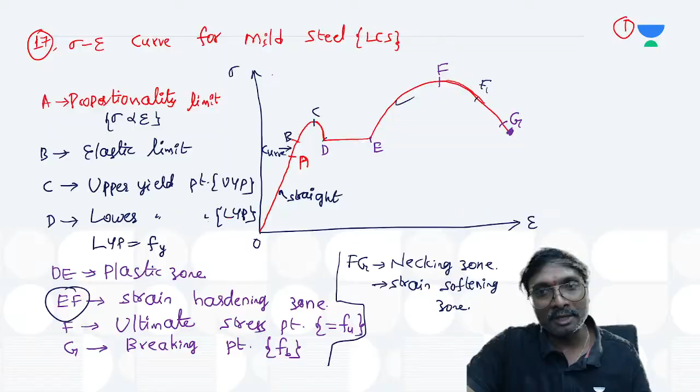Now coming to this, which part we have discussed - 16 lectures are already over now. Today we are doing the 17th lecture, right everyone?

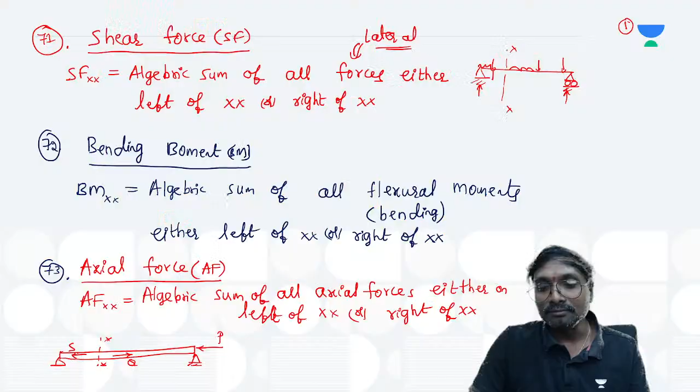Today which lecture are we doing? This is the 17th lecture.

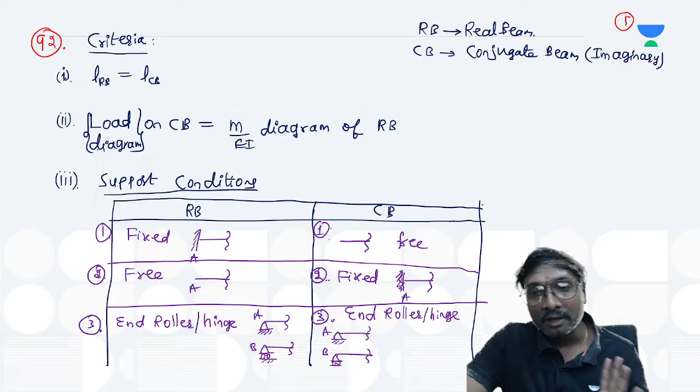So this is what we have done: location of the shear center. What is shear center? Before that, we also derived the expression for shear stress. Location of the shear center we have done, up to 105 points it gets over, right?

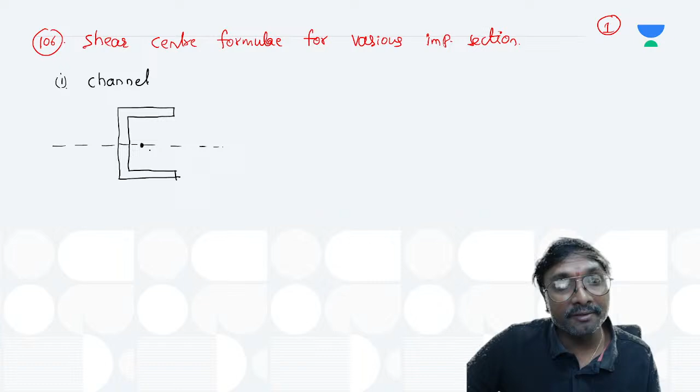And now what is this axis? If you just observe, this is your symmetrical axis. About this axis only the CG will be present. Shear center also will be present on this symmetrical axis only, but it will not coincide with the CG.

Why will it not coincide with the CG? Because it is unsymmetrical with respect to the YY axis. Therefore, the shear center will be somewhere outside. This is your SC.

Now, from the center of the web - this is the center of the web - and this is the center of the flanges, the bottom flange and the top flange. Now what are the dimensions we are having?

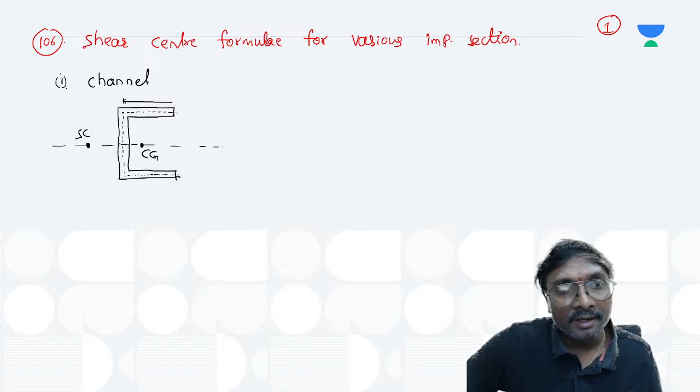From the center of the web to the end of the flange, this is given as your small b. The total thickness of the flange is given as TF. And H is given from the center of the top flange to the center of the bottom flange. Like this it is given.

Then this distance is taken as your E. What is that E? It's the location of the shear center from the center of the web. So what is the value of E? That is b squared h squared TF,

divided by 4 times IZ, where TF is the thickness of the flange. IZ is nothing but the moment of inertia about the ZZ axis.

TF is thickness of flange, b is the width from the end of the flange to the center of the web, and H is from the center of the top flange to the center of the bottom flange. Is that clear now?

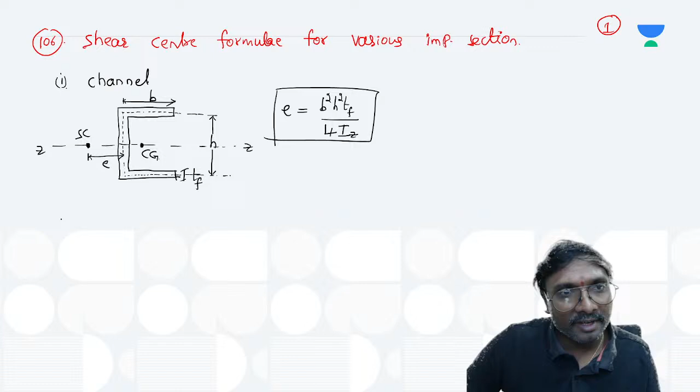Next, whenever it is the second one, if you just observe, the semi-circular section. This is half of a circle only. What is this axis? If you just observe, this axis is your symmetrical axis, and your CG will be present at this location.

Okay, and this is which one? This is center of this circle. Now what is this point O? You can say center of the circle. That O is nothing but the center of the circle.

And what is that if you just observe it? That is your radius - radius up to which point? Up to the center of the member only, not up to the end. Center of the circle to the midpoint of the thickness. So from here to here only will be taken as the radius.

Now, what is that E value, right?

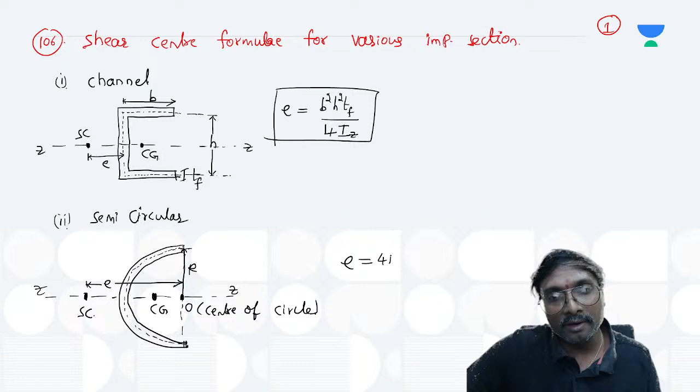Your shear center will be present on this ZZ axis only, definitely, right? This is your shear center if you just observe. What is the distance of this shear center from the center of this circle? This E will be your shear center, right? That is your 4R by pi if you just observe. That is which one? 4R by pi you can say. Is it not 4R by pi, right?

But do you give guarantee that always semicircular only will come into picture? No, no, there might be some circular arc also comes into picture, you can see. Some other angle.

So whenever you are considering this circular arc section, if you just observe, is it exactly the half circle, right? No, it need not be the half circle. So this is your axis of symmetry where the CG lies and also the center of this circle lies. So this is some circular arc we are selecting.

Like this we are having. So this is the point where the center of this circle O lies, you can say. Now what is this angle? Let us say this angle is theta. And what is this angle? This angle is also theta, you can say, because we don't know at which one it is present. So with respect to the center, the ends of this arc are making an angle 2 theta.

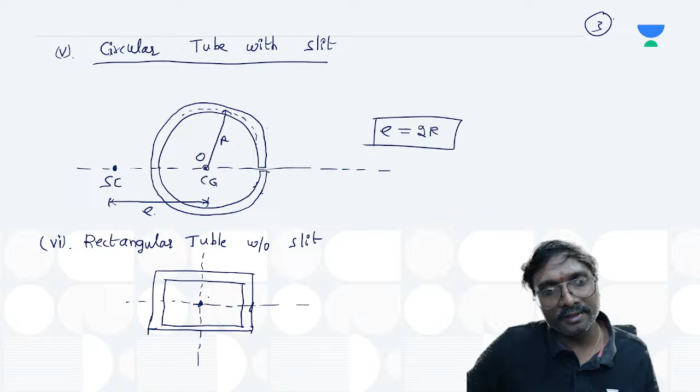Shear center and this CG, both will coincide. This is your shear center and this itself will be your CG, without a slit. But whenever there is a slit, what happens?

Rectangular tube without a slit. Whenever there is a rectangular tube with a slit, first you identify this axis of symmetry.

There is a small slot you are having. Approximately that CG will be here only. And this height, from the top thickness center to the bottom thickness center - what is that height we are representing? That is represented as H, similar to that of your channel section only. This is the center of the web thickness, with a slit, that is without slit.

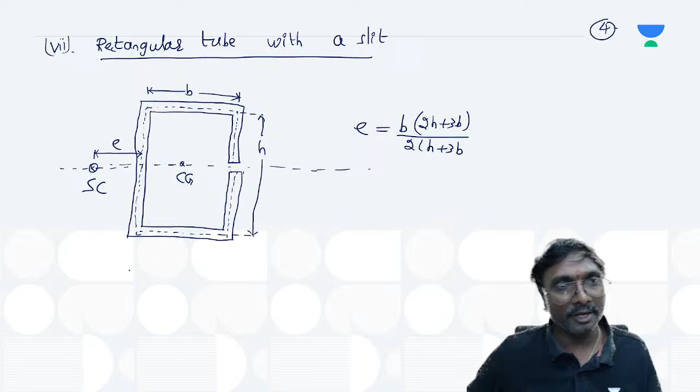What is that E? If you just observe, that is B into 2H plus 3B divided by 2 into H plus 3B. That is your H, and can we say this is your B? Yes, this is your B - from center of left web to center of right web, that is your B you are having.

Seventh one. Eighth one, if you just observe - what is the eighth one? That is your diamond section. Diamond with a slit or without a slit - that diamond section without a slit, what is it?

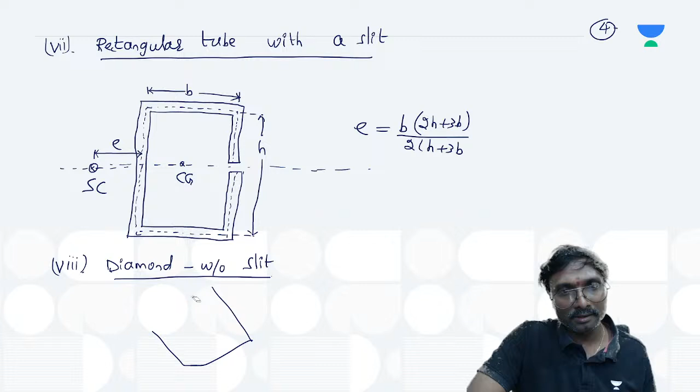This is exactly a symmetrical one. Alright, it is not moving below that. One sec, just let me draw this small diagram here.

So what is that happening? Tell me if you just observe it. Because it is symmetrical with respect to x-axis and symmetrical with respect to y-y axis, this is your CG and this itself will be your SC, right? Now this is your 8th section.

9th one, if you just observe - what is that? That is a diamond section, right? What is that if you just observe? Diamond section with slot, with slit. Diamond tube, okay? This is not the full solid diamond, this is a tube, okay? You have to be careful - tubular section only. Now, if you are considering it, this is your axis of symmetry.

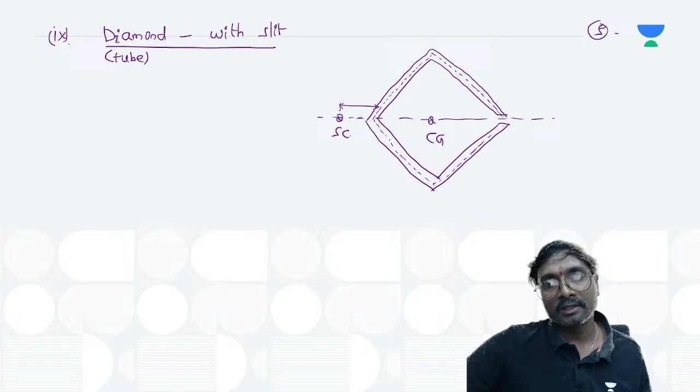This is your E. And what is that E value if you just observe? That is your B by 2 root 2. What is your B if you just observe? This is your thickness, total thickness. And from this center to that center - what is it considered? That is your B. From this center to this center, what is it considered? That is your B or not? So this is also B only, you can say. Like that. Next.

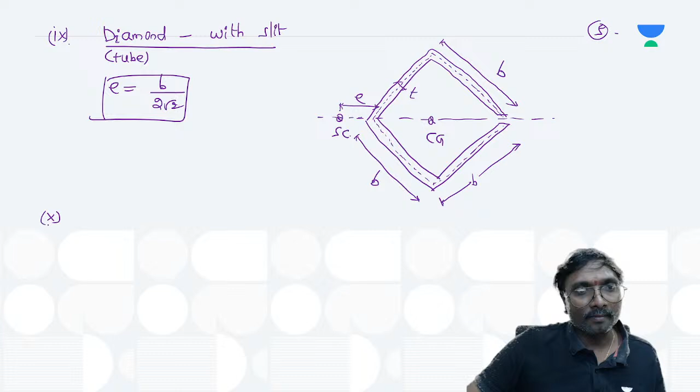Whenever it is an I section, if you just observe, whenever you are considering a symmetrical I section, what is that I section? Automatically the I section is symmetrical.

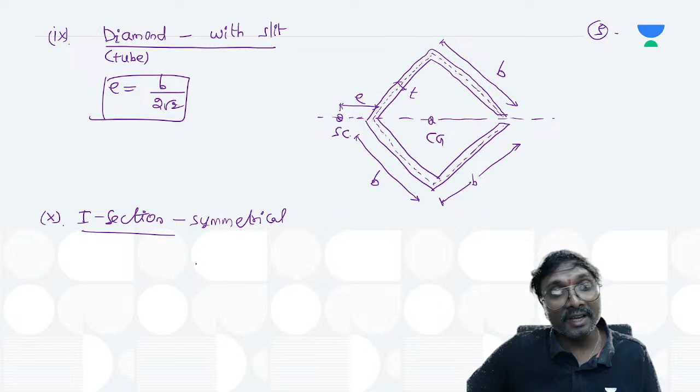For a symmetrical I section, what can you say? It is fully symmetrical about this axis, both the axes. Both your shear center and the centroid will be coinciding absolutely 100%, is it not?

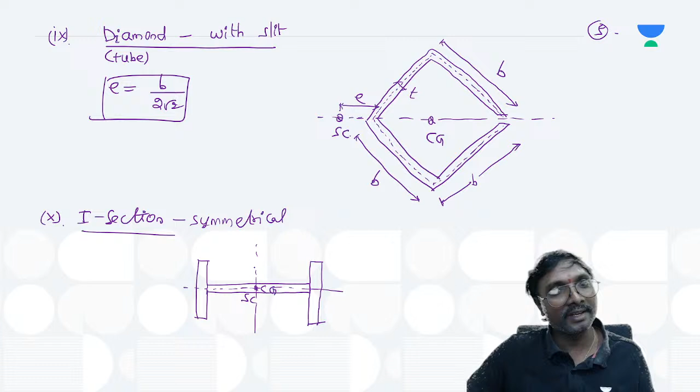This is your centroidal axis in this direction. So here CG as well as SC, both will be coinciding here itself. Now the last one we'll see, the 11th one.

Is this I section symmetrical about both, or is it unsymmetrical? It is unsymmetrical about one axis. Unsymmetrical about one axis means it may be symmetrical about the other axis if you just observe, there is a possibility.

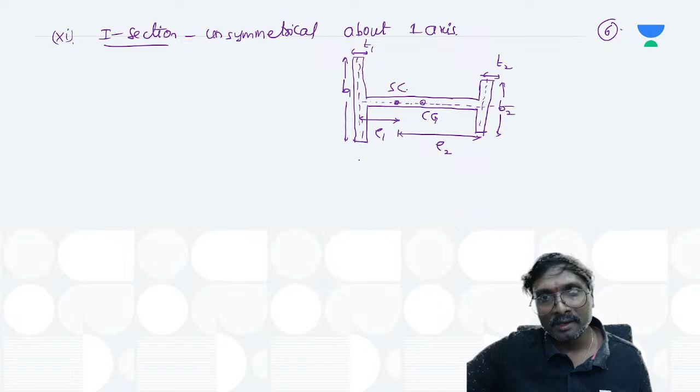So this thickness will be T2, and this thickness will be T1. If both thicknesses are same, T1 equal to T2, you substitute. And what is this width? You can say B2. And what is this width? B1. And let us say from here to here it is your H.

So now if you want to write the expression for E1, you can say E1 equal to T2 into B2 cube, H divided by T1 B1 cube plus T2 B2 cube.

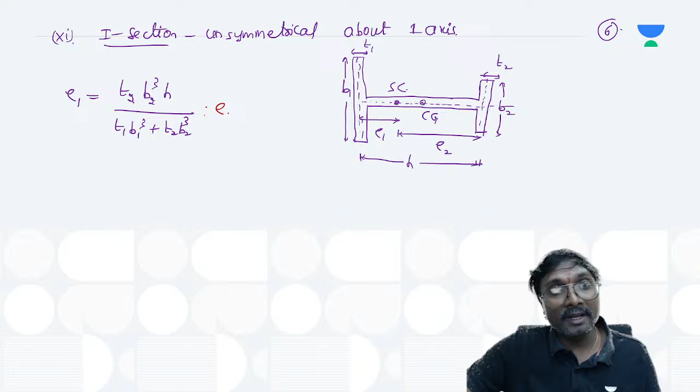Then what is E2? Similarly, if you just observe, E2 is nothing but everything changing: T1 into B1 cube, H divided by the same denominator, T1 B1 cube plus T2 B2 cube. Like that we are having the shear center formulae for various sections.

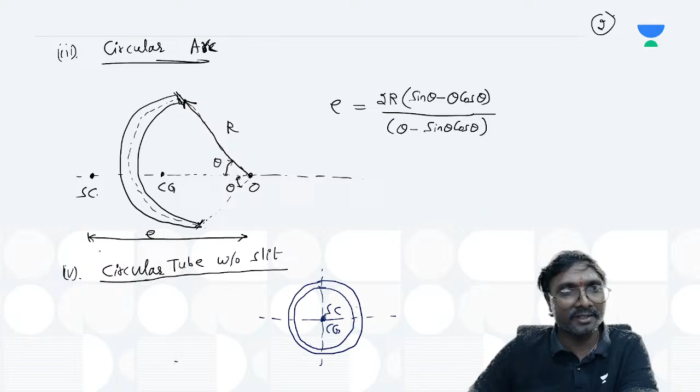It's over, right? Now coming to shear stress distribution, this is 106 point, now 107 point. So if you consider shear stress distribution for various cross sections, for this rectangular one, let me directly write it.

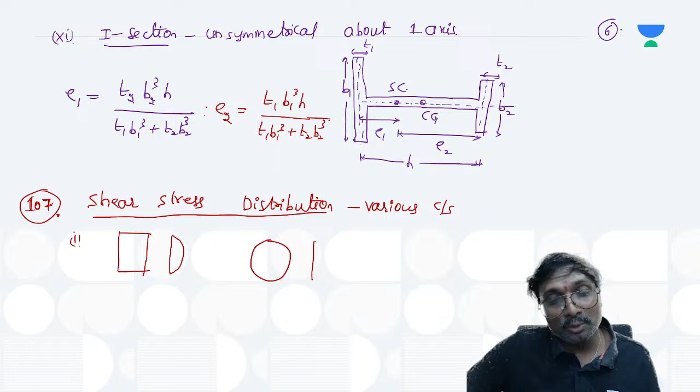So for this rectangular section, how is it? It is in this manner, parabolic, you can say. And for this circular also, it will be in which manner? That is parabolic only. And for this triangular also, what is it? If you just observe, this is in this parabolic manner only, for triangular also, like that.

And for this next section, what is another section you can say? This is your diamond section. For this diamond section, what is it you are having?

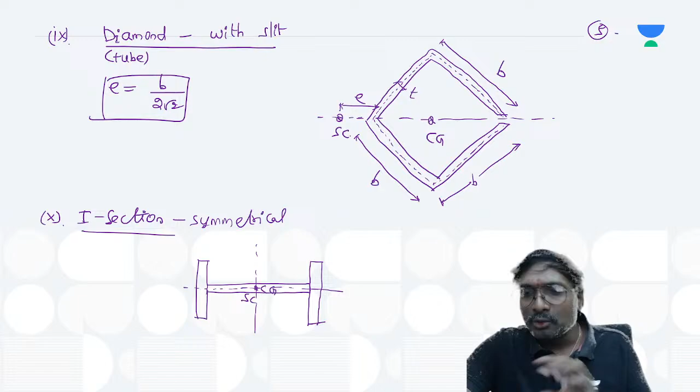See actually, at this BTech level, you are only having the basic things. For regular sections only will you have the shear center, and for non-regular sections you have to use the concept of thin plates, theory of elasticity concepts, and theory of plates and shells concepts. We just cannot get it directly, we just cannot guess directly. In that random section also, if at all there is any symmetrical section present...

So this point: shear center does not coincide with the CG in general, except if the section is symmetrical about both axes, in which case it coincides with CG. SC always lies on the axis of symmetry. If that random section you are selecting has only one axis of symmetry, it lies on that axis of symmetry.

Otherwise, what you can do is just compare with nearby members. So whenever members are made up of two or more narrow rectangular members, the junction of these will be giving the shear center location. You can use these three tricks, and if any of these are valid, you can just select that.

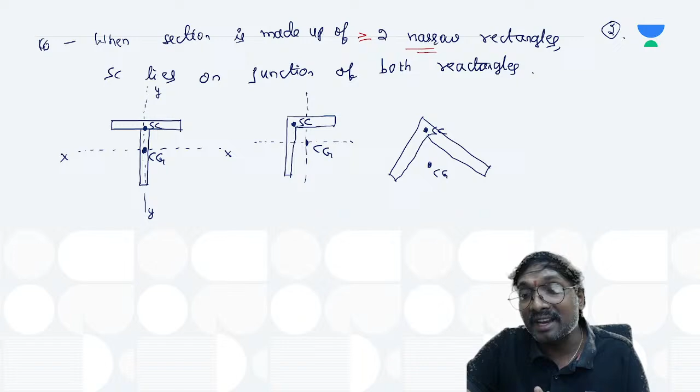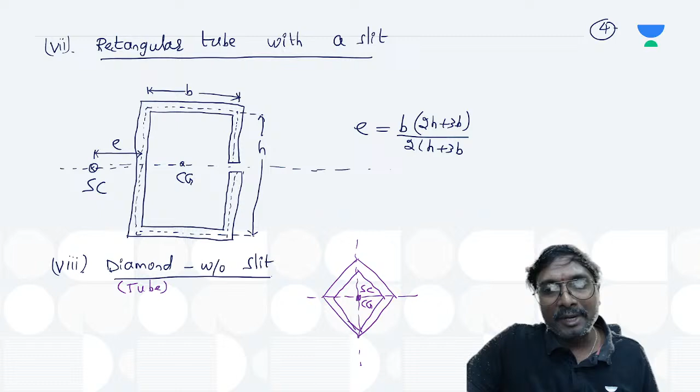If these are not valid enough, then you can go with theory of elasticity concepts and theory of thin shells and plates concepts, which you will study in MTech. With this BTech knowledge you cannot do it, but generally you will mostly have questions from these regular sections only. So for this diamond section, this is how it will be.

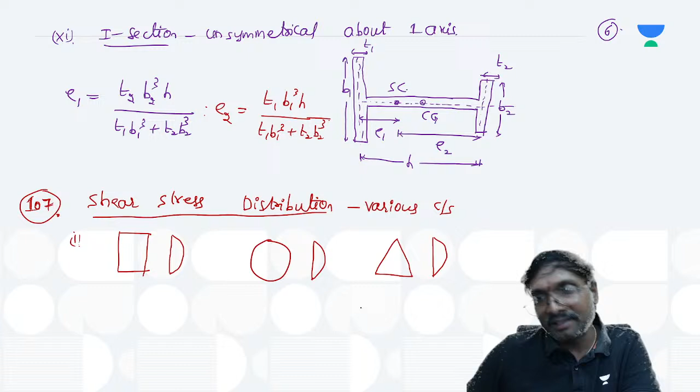Got it? Now if you are having this rectangular section also, rectangular hollow section, that is a box section, how it is? Same as that of your I section only, right? So sudden change in the width you are having, sudden change in the shear stress? So like this you have same as that of your I section only, exactly same as that you can have. Like that, these are the various cross sections for which this is a shear stress distribution.